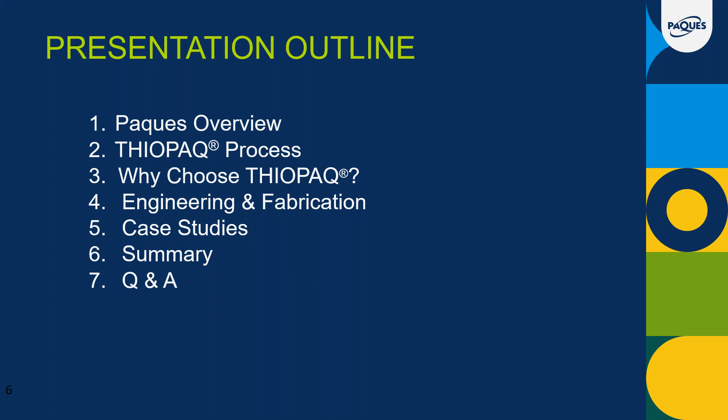So without further ado, next slide, please.

Okay, let's go. So Paques is just over 60 years old. It was founded in 1960 in a place called Balk in Friesland, in the north of the Netherlands, about an hour north from Amsterdam for those of you who have traveled in Europe. It's a small town called Balk, of which Paques is the major employer.

Over the years, as you can see from the map, we've expanded across the globe, first in China and then building up in Brazil, North America, Malaysia, and for Asia Pacific in Kuala Lumpur. We also have an office in Thailand, and also Chennai in India. You can see that we have a variety of production sites across the world, as well as laboratories and very important pilot facilities for what we do.

It was founded by the Paques family, and originally it was just building tanks for farmers, for silos. And then the founder, Mr. Paques, met with a couple of other guys, and they started to look at the possibilities of using bacteria. And then was born the idea of anaerobic digestion. We've obviously moved on from there, from those very early days and our humble beginnings.

And now we're 62 years old with more than 500 people. We have installations in over 60 countries, and Paques is present in one way or another, often largely, in more than 3,000 places worldwide.

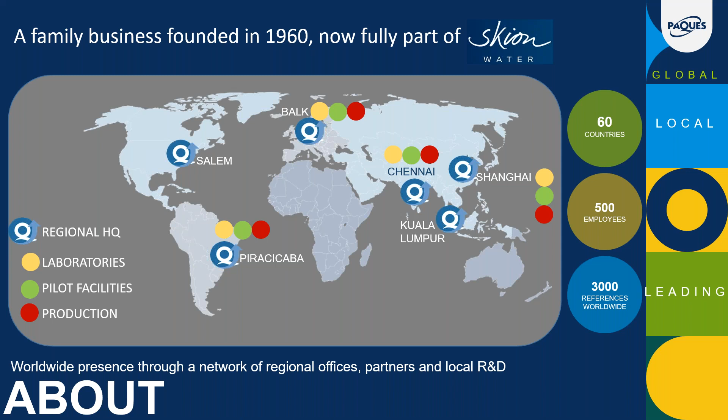Okay, so the essence of what Paques does is using biotechnology to clean wastewater and gas. And today we're going to concentrate on the THIOPAQ, the sulfur system. If you look very briefly here, you'll see that we genuinely are numerically the market leaders, but also we're the market leaders for the level of research and invention that we do.

Major markets that we work in across the globe are the pulp and paper industry, especially packaging, the food and dairy industry, beer and beverage. I'm not going to read all of those through, but I'm sure many of you on the call are from those industries, and municipal as well. We concentrate on the removal of COD, desulfurization, which we're talking about today, and then of course nitrogen and phosphorus removal, and indeed sulfate removal.

Thank you. Okay, so our tagline, green before green was a thing. We came up with that recently because we felt that what Paques does has always been green. But sustainability became much more of a thing globally, and it's an increasing thing now as all over the world, all our major customers are asking us, what are you doing for sustainability? How can you help us with our sustainability? Most companies are employing people who are specifically responsible for sustainability. It's a big thing, and we're a big part of that, so we feel that this tagline is very fair.

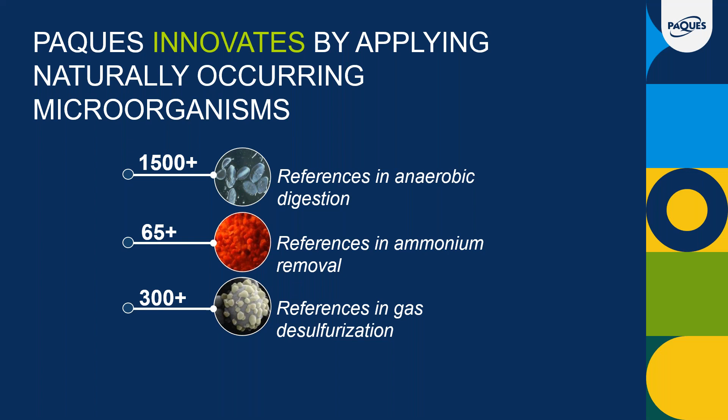Okay, so we take nature and we do something with it. All these references in anaerobic digestion, for COD removal, ammonium removal, nitrogen removal, and desulfurization, which we're talking about today, are about taking bacteria. I like to describe it as we make little villages of them, which create the granules. More people call it the granules, that's the proper title, but I like to call it little villages of clever bacteria, which with some serious R&D and technology go into the tanks and they do their magic. It's a natural thing. We're part of nature, and we like that.

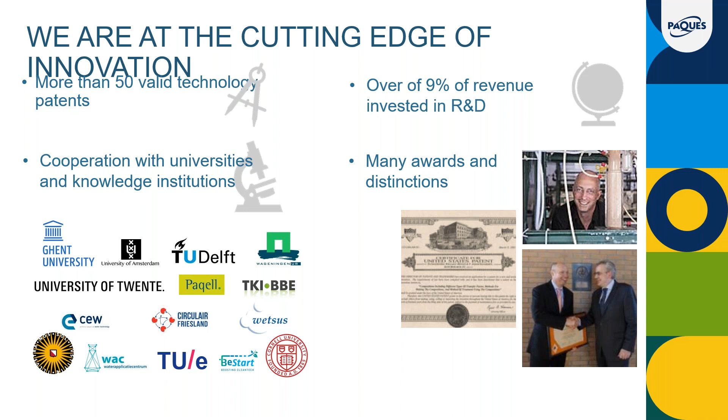Next slide, please. Now we'll get into the THIOPAQ process. I'll give a general introduction, and then Andrew will get into the details after that. Next slide, please.

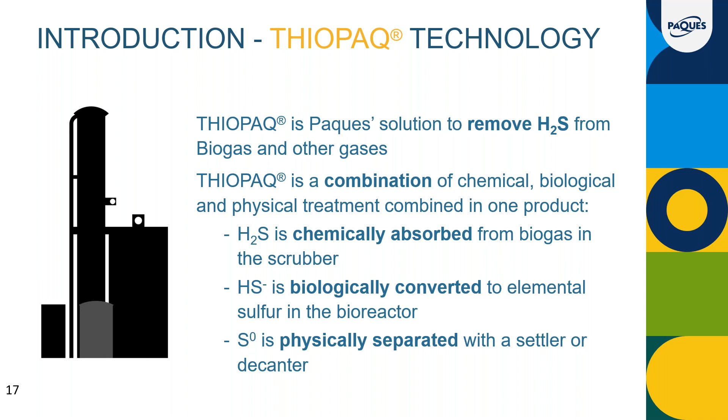So sometimes the THIOPAQ is called a biological scrubber. It's really not. It's a combination of a chemical scrubber and a biological conversion of the sulfide that is removed in the bioreactor, and then a physical separation of the sulfur that is produced, which is a solid, in either a settler by gravity or a decanter. Next slide, please.

So the THIOPAQ process, or the roots of it, were developed in the mid 80s and late 80s in cooperation with the University of Wageningen in the Netherlands. And the first THIOPAQ was installed in 1992 at a combination of paper mills in the Netherlands. So that was the first plant, and I think it started up in 1993.

And you see, it took a while before the technology really took off, maybe 10 to 12 years or so. But once it became clear that this was a real cost-effective technology for removal of hydrogen sulfide from gases, which means from biogas, landfill gas, and even gas of the oil and gas industry, it really took off ever since.

Right now, of course, there's many projects in North America for treatment of dairy gas produced from dairy manure. But before that, the initial, let's say, 10 to 15 years, the majority of the THIOPAQ installations were at high-rate anaerobic treatment plants. So basically, Steve already showed a little bit of it, anaerobic reactors that treat effluent of industries, as well as a few landfills. But to date, probably about 2/3 of all the THIOPAQ installations are at industrial wastewater facilities.

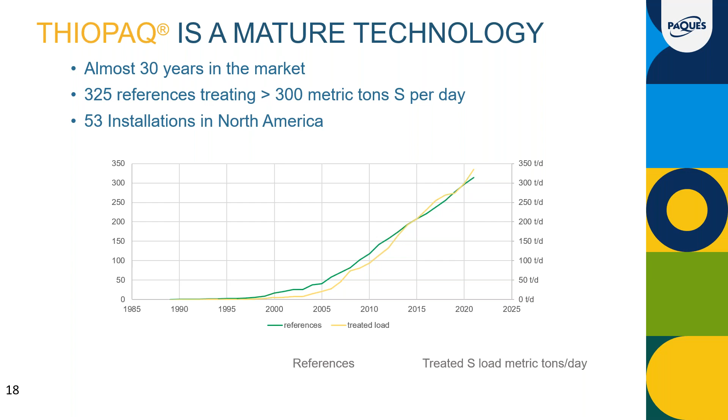By now we have about 325 plants working, or some of them still in the construction stage, and treating a total of about 300 metric tons sulfur per day altogether. And there's by now 53 plants in North America.

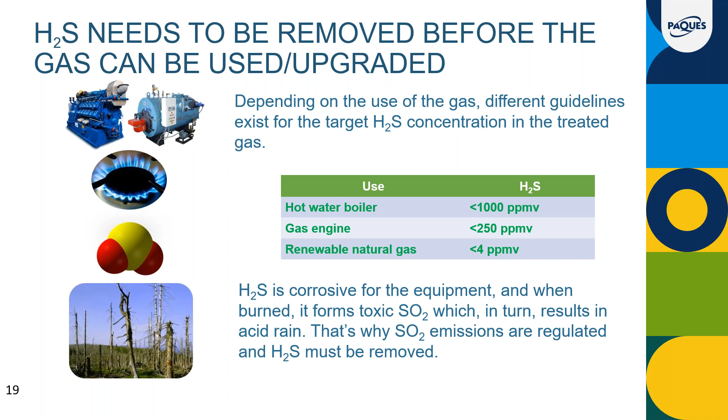Next slide, please. Well, I think we all know why hydrogen sulfide needs to be removed. It's very toxic. It's very corrosive. That's another reason, and it also produces sulfur dioxide upon combustion. So there's environmental regulations to control emissions. Next slide, please.

Paques uses only naturally occurring bacteria. Almost all technologies that Paques has developed involve bacteria, like the anaerobic reactors, the digestion process, the Anammox reactor. It's also a process that uses bacteria to convert ammonia into nitrogen gas, and the THIOPAQ also, which uses thiobacillus bacteria, of which there are many kinds.

We use a specific bacteria that is very salt-loving, halo-tolerant sulfide oxidizing bacteria. So halo-tolerant means salt-loving, and these bacteria don't need an organic material to grow. They get it from chemicals such as sulfur or sulfide. And these bacteria are very hardy. They can grow under very extreme conditions, depending on the type of bacteria that you isolate.

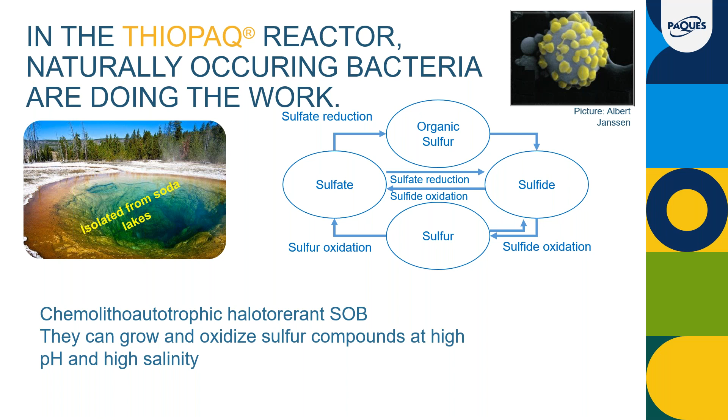In the right corner on the top, you see a bacteria, a thiobacillus bacteria, that excretes the elemental sulfur that it produces. So the little yellow bulbs, that's elemental sulfur. Next slide. Andrew will explain the process in more detail.

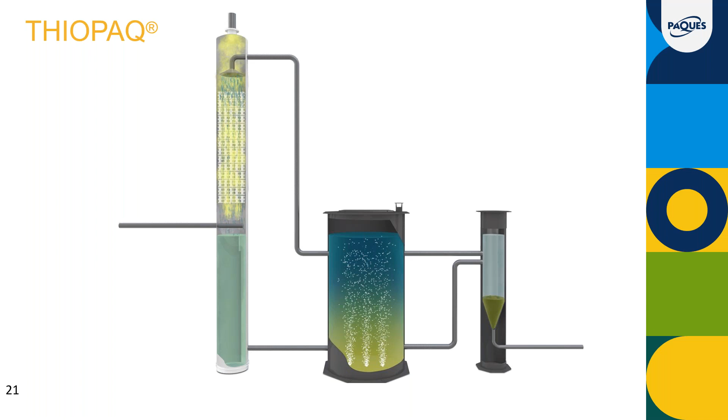Yeah, well, thanks, Martin. Yeah, so the THIOPAQ process consists of 3 main process steps. You have a scrubber column, which is an absorber. You have a bioreactor, and a means of settling the sulfur in a physical separation device, shown here as a settler. Next slide, please.

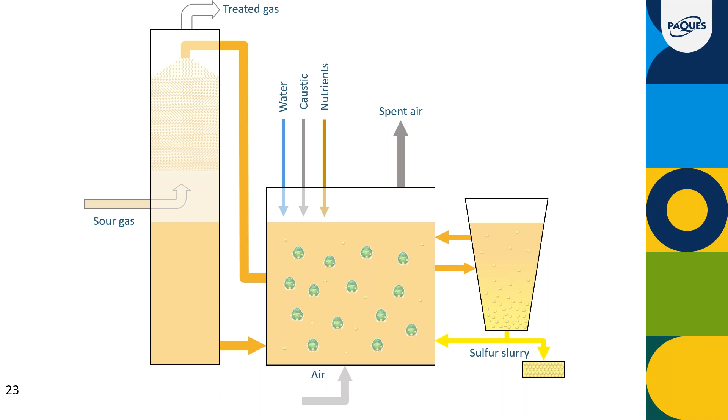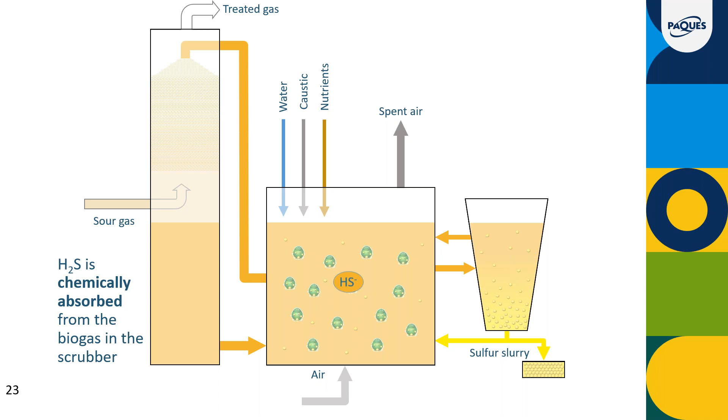So what we're doing in the bioreactor is converting the hydrogen sulfide into elemental sulfur, and then that elemental sulfur is removed in the sulfur settler. If we can advance the animation, please. And then the final disposition of that sulfur particle is removed from the settler and leaves the process.

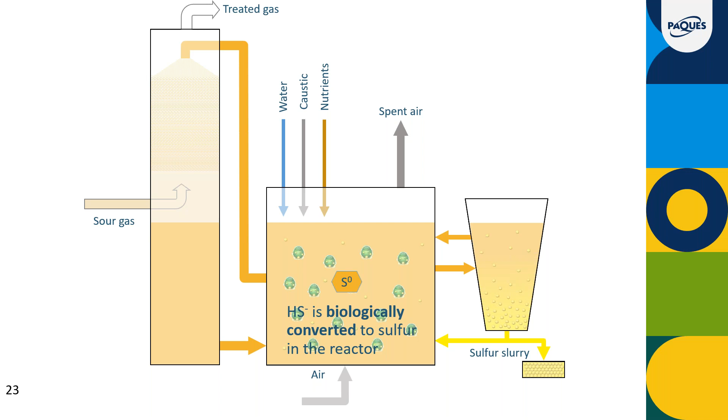So that gives you just a rough overview of the disposition of the sulfur as it moves through the process. It goes from the gas phase to the liquid phase as sulfide, and then to elemental sulfur, and then out as a slurry in the settler. Next slide, please. Next slide.

Okay, if we can keep going with the animation. So the biogas, again, I'm going to drill down a little bit into these 3 unit operations so you really understand what's happening here. Again, we have a water wash. We're taking the liquid stream from the bioreactor and flowing countercurrent to the biogas, which is flowing up.

And the packing material, there's about 6 meters to 10 meters or so of packing material inside of the scrubber. This is the plastic rings that you see here. And this provides a high surface area to have the intimate gas-liquid contact, so that mass transfer of the hydrogen sulfide into the aqueous phase as sulfide readily happens. And this is an alkaline wash.

So we call this, as Martin mentioned, chemical absorption. There's nothing biological going on here. It's all chemical. It's a caustic scrubber, and the H2S readily moves into the aqueous phase when there is an elevated pH. So typically we're around 8.3 to 8.5 pH.

So the reaction here that you see is, of course, since it is a caustic scrubber, we are consuming alkalinity. And alkalinity is represented there as the OH minus molecule. So we take the hydrogen sulfide plus the OH minus, and that gives us the bisulfide, which comes out of the bottom of the scrubber, and now we're going into the bioreactor. Okay, next slide, please.

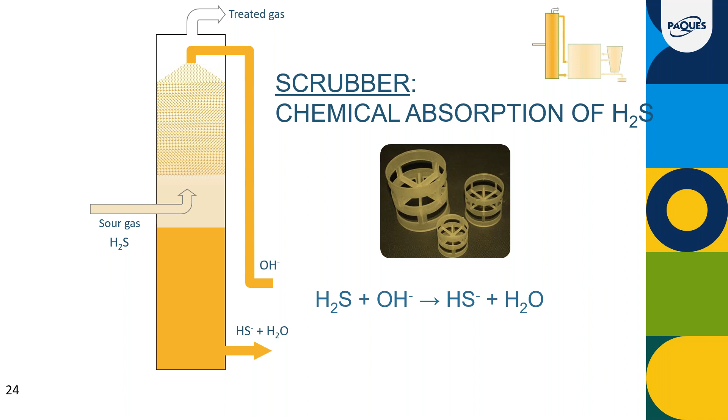So again, the bioreactor is the heart of the process. This is where all of our controls and automation are; the scrubbing part is relatively easy. We're adding water to the top, and we're flowing the biogas, and that scrubbing happens very simply. In the bioreactor, we have to make sure the conditions are just right for this process to happen. We want to keep the bacteria happy. So how do we do that?

We need to add air, because air is part of the reaction. We need to have oxygen. There are air strings at the bottom of the bioreactor with diffusers that provide not only air and oxygenation to the bioreactor contents, but also some mixing.

It's very important to note that the air that we add is completely decoupled from the scrubber, so we're not introducing any air into the scrubber. This just comes into the bioreactor and then out the top of the bioreactor as spent or exhaust ventilation air, if you will. That vent air typically is very, very low in H2S, non-detect, and it just goes to atmosphere.

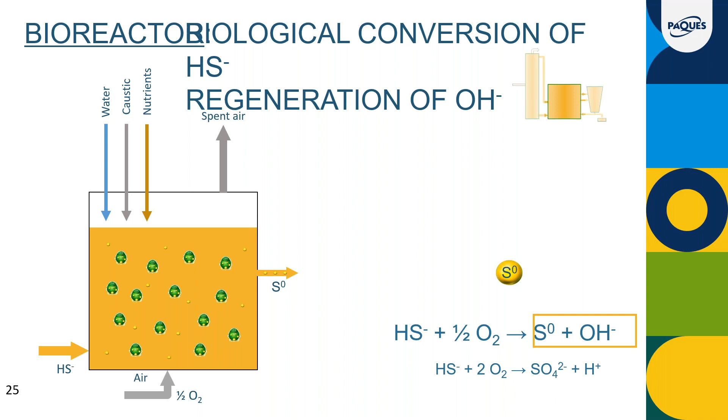So the key thing to note here, and this is really the heart of this process, is what's outlined there in the orange box on the equation, and that is that we're producing the elemental sulfur so it can be easily removed from the process. And as part of doing that, we're regenerating the alkalinity. So recall from the previous slide, we're consuming that alkalinity, while in this process, we're producing that alkalinity. So the net effect is we get a very low operating cost per pound of sulfur that we're removing. Okay, next slide, please.

So the final step in the process: we've taken the H2S from the gas stream to the sulfide, and the bioreactor converted it from sulfide to elemental sulfur. Now we've got to remove the solid from the process. So in this picture, we're showing a simple cone bottom settler. If we can advance the animation, we'll see some of the other devices that are used here.

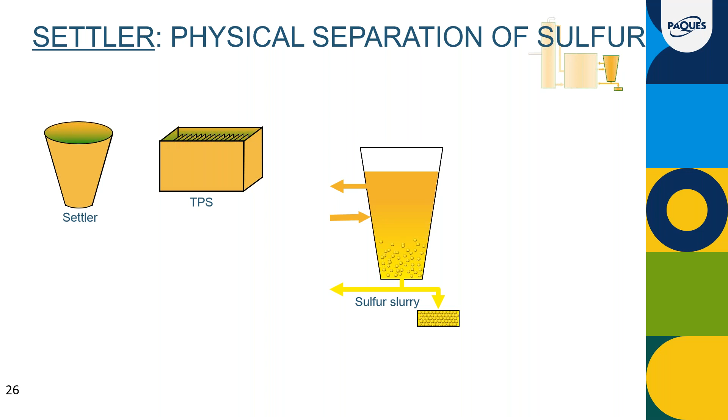We can use a tilted plate separator to enhance the surface area and the settling characteristics of these particles, or we can use a centrifuge that will generate solids on the order of maybe 55 to 60% solids. And for our larger installations, we're generally going to use a centrifuge just because it makes the process more efficient, and we're just dealing with a lot of sulfur.

And also this material, as Steve and Martin mentioned, can be used as a fertilizer. Paques has the FertiPaq business, and it can be used as a fertilizer, or more typically what's being done in North America is it's just being used as a soil amendment and discharged maybe in some aerobic lagoons and used to irrigate some of the fields.

Okay, next slide, please.

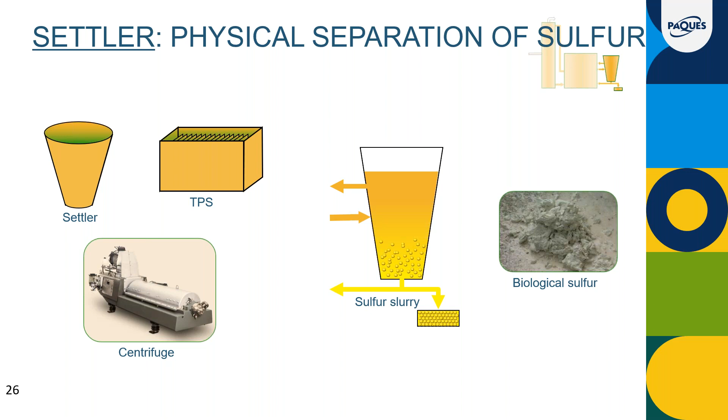What can you expect as far as performance and reliability? Well, this process can take very high levels of hydrogen sulfide. We have installations that are taking H2S levels upwards of 20,000 ppm and higher, and we can get removals down to less than 25 ppm.

Since it's a chemical scrubber, like I said, the absorption process happens very readily, and so we can get very good removals, and we monitor the alkalinity to get the levels of removal that we need, and also design the scrubber in such a way with particular packing height to get the right target removals for our customers.

It's a very reliable process. There's not a whole lot of moving parts. We just have some rotating equipment. The circulation pump, which, like I said, just runs in a closed loop, delivering that wash solution to the top of the scrubber. And again, because we're regenerating the sodium hydroxide, the operational costs are extremely low.

And as I mentioned, there is no dilution with air. The oxygen that we add to the bioreactor is completely decoupled from the scrubber. I also wanted to mention that this sulfur that we're producing is hydrophilic, so we're not going to be seeing any plugging or anything in the packing. So it's very user-friendly. Operational costs are low with the high removal. Next slide, please.

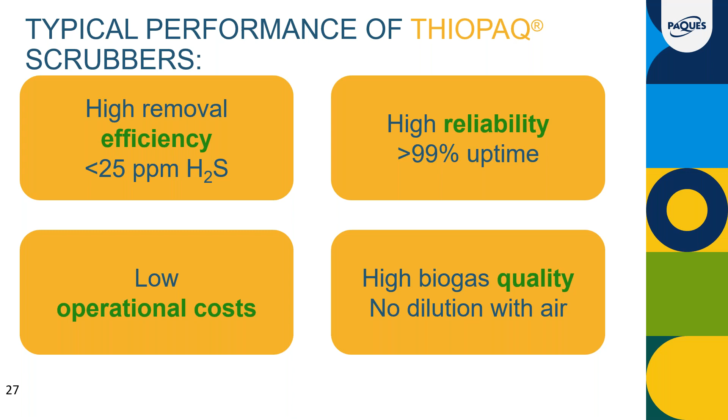So what do you do if you feel like you have an application that you have hydrogen sulfide in your biogas? Well, you can call Martin or I. Our contact details, I believe, are in the slides here. And we'll talk to you about your application, and we'll send you a questionnaire. Sometimes we'll just fill it out with you on the phone and get some of the basics of your application.

What's the gas flow rate? What's the H2S concentration? What are you looking for as far as treatment? Do you operate in a campaign mode? In other words, do you operate for a certain amount of time and then you're down for a couple of weeks? Or are you a manure dairy, a cow dairy where the cows don't stop pooping, we're just running all the time? We need to know this kind of information so we can configure our system to meet your specific needs.

Of course, we need all the characteristics, if there's any VOCs, is it a landfill, is it a food digester, CO2 concentration, oxygen concentration, and those types of things. So generally, we can turn a proposal around in a matter of a couple of days. So we look forward to getting some of your inquiries and seeing how this technology best fits your specific application. Next slide, please.

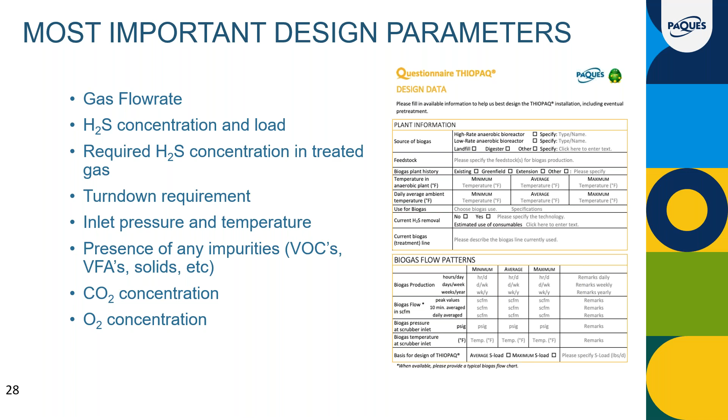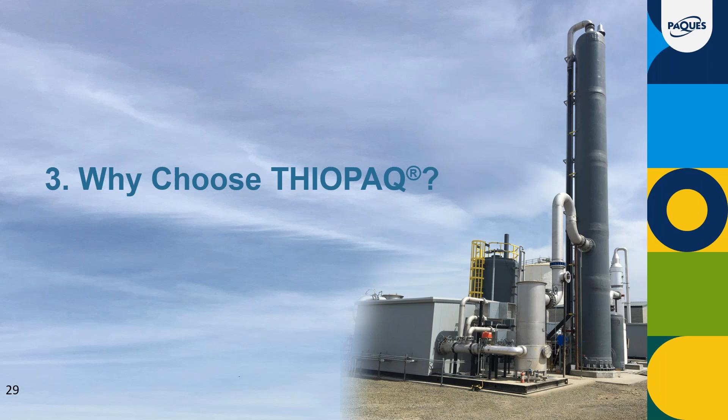Okay, so I'm going to turn it over back to Martin, and he's going to talk about some of the specifics as to why you should choose this technology. Thanks, Andrew. Next slide, please. So why choose the THIOPAQ? Well, Andrew already explained some of the reasons.

The major reason overall for most of our customers, and especially for RNG projects, is the lowest total cost of ownership for many desulfurization applications. Certainly when the sulfur load is more than, and this applies to North America, approximately 80 pounds per day, then the THIOPAQ scrubber already becomes attractive. In some countries, it's even at lower sulfur quantities.

But this is mainly because of the low operating costs, because the biggest portion of the operating cost is usually the caustic, but the caustic consumption is so low, it varies in the range of about 0.3 to approximately 0.7 pounds of 100% caustic per pound of sulfur removed. This of course helps tremendously. Also, the process is very robust and therefore reliable.

Our typical uptime is more than 98%, and this is also very important for the RNG market because of the very high value of the biogas, so that people want to get everything out of their biogas supply, and they don't want the hydrogen sulfide removal portion to interfere with that. Many plants also have greater than 99% uptime.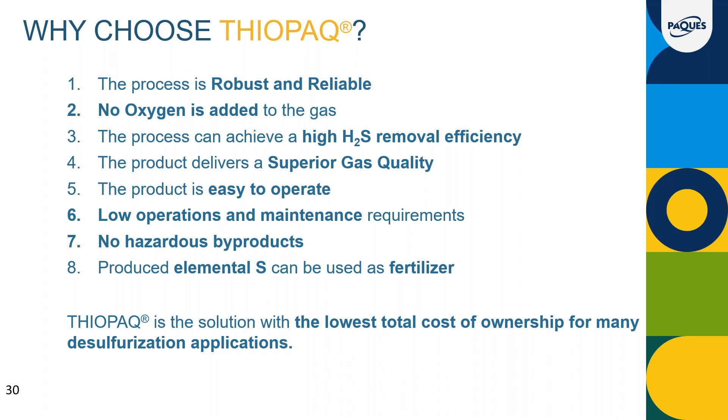The biggest market by sulfur quantity for us is oil and gas. Those projects are done through Paqell, because that market requires meeting different standards that Paques itself is less accustomed to. So those are handled through Paqell, which is based in the Netherlands, a 50-50 joint venture between Shell and Paques.

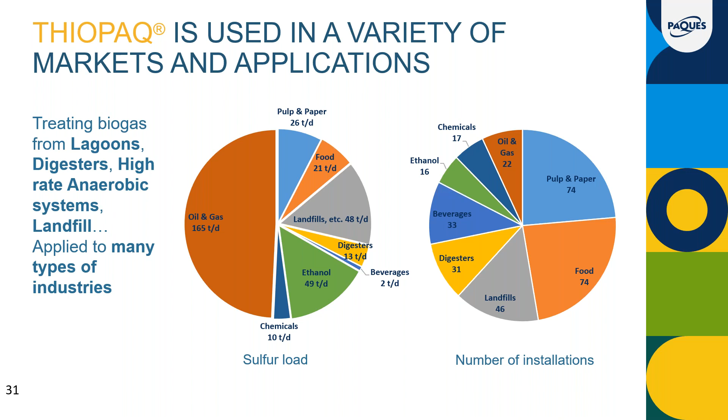So almost half the sulfur load treated is from the oil and gas industry, followed by landfills, because landfill gas can also have very large and high sulfur concentrations. Next slide, please.

Here are two examples of some extremes. To the left is a very small scrubber that only treats 20 pounds a day and 60 CFM.

And I forgot which country that is, but still that was an attractive solution for such a small THIOPAQ versus another technology. In the US, we don't sell them this small. The smallest one would treat up to about 275 pounds of sulfur a day, and from 200 to probably something like 900 CFM. So it would be overkill for such a small application.

The largest one is in Korea, South Korea, at a landfill. You see the big scrubber there, and it treats 20,000 CFM. Our scrubbers, of course, if you hear caustic scrubber, you think of much smaller scrubbers probably. Ours are much larger because we operate only at a pH of 8 to 8.5. So the driving force for hydrosulfide to be absorbed is much smaller than in a traditional caustic scrubber, where you operate at pH of 11 or 12 or even higher. But because we operate at this low pH, we also don't absorb all the carbon dioxide that consumes caustic. That's the big advantage of operating at this lower pH.

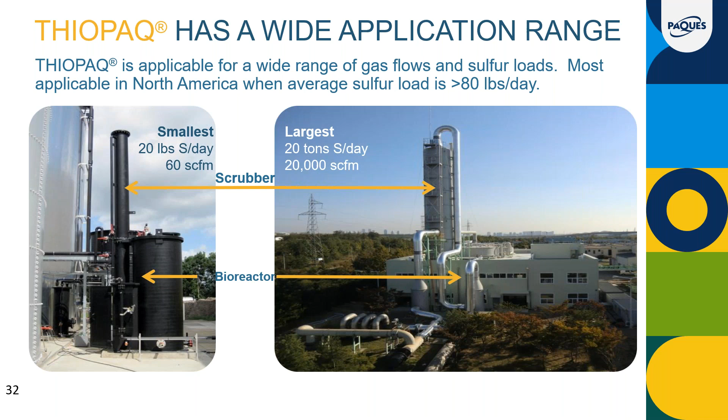Here you see some different examples of THIOPAQ installations. They all look a little bit different from what we typically provide in North America. The 4 and 13 ton per day units are at oil and gas plants. In the US, we provide a more standardized system up to a certain treatment capacity, so we typically provide the scrubber, the bioreactor, the container with all the process equipment, and then the technical services, the basic engineering, the P&IDs, etc. Up to a certain load, we containerize the equipment. If the load or gas flow is higher, we can't follow this approach anymore, and the process equipment is shipped loose.

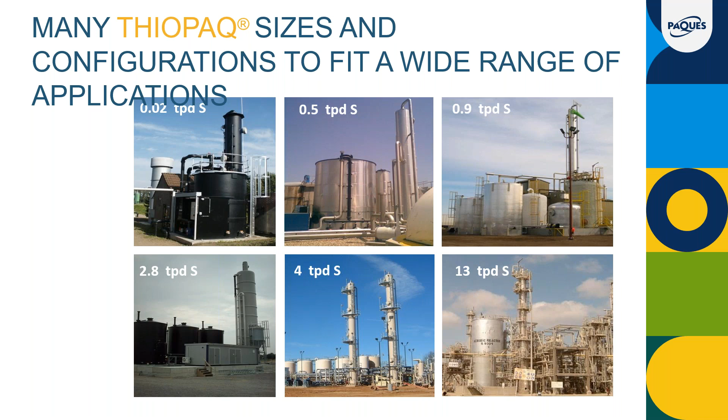This is a little bit about operating requirements, operating and maintenance requirements. For a typical installation, if you don't have a decanter, it takes on average between half an hour and at most about an hour a day to operate and maintain the system.

The consumables are caustic, which can be 50% or sometimes 20 or 30%, depending on the customer, and a nutrient solution which Paques provides. Utilities include water, which has to be below a certain hardness of 10 degrees German hardness, or 170 milligrams per liter calcium carbonate, power, instrument air, and there's a heating and cooling requirement.

We often want to cool the gas prior to the scrubber just to remove some condensables. Often we do that such that no heating or cooling of the processed liquid is required anymore. The THIOPAQ process itself, the conversion of sulfide to elemental sulfur, is exothermic, so it produces heat that, if there's too much, needs to be removed. Also, dissolving caustic in water produces some heat, that's an exothermic reaction. And the air that is injected into the bioreactor is also hot at that point and produces some heat.

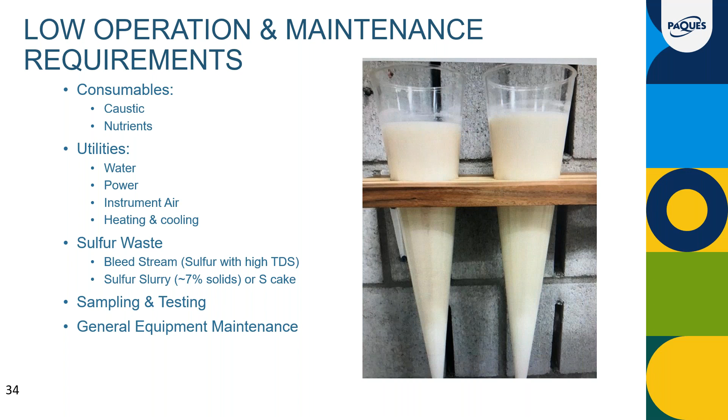We've seen some other technologies in the market as well. The scavenger and media and activated carbon systems tend to be economical for lower sulfur loads, we think above about 80 pounds a day that the THIOPAQ is very competitive. We've seen bioscrubbers, but they tend to be more for very low sulfur loads, and where you don't mind adding air to the biogas, so not so much for RNG applications.

Iron chelate, we've seen that more for higher sulfur loads, and in particular in the oil and gas industry. We don't know if the sulfur cake that they produce is acceptable for agricultural disposal, because it might contain other chemicals that are used in the process.

And we've also had some competition from companies that like our technology very much and have tried to copy it, but most of them, or all of them, I believe, not very successful. Next slide, please.

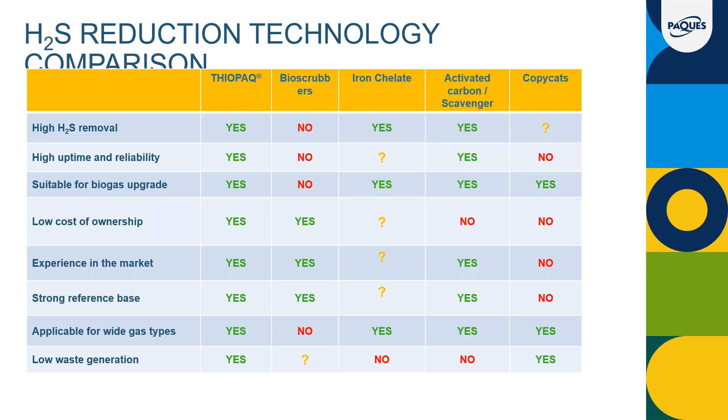And it's back to Andrew again. Yeah, okay, thanks, Martin. I'm going to touch here a little bit on the engineering and fabrication aspects of the technology. So next slide, please.

So when you buy a system from Paques, you get a very detailed, comprehensive engineering package. It's really configured for what the EPC contractor needs to do the complete upgrading process or the complete biogas installation, whether it is upgrading or maybe pre-treatment for a cogen process or whatever.

We don't do the installation ourselves, but we provide a very comprehensive engineering package for that. So what does that include? It's a very detailed mass and energy balance. You'll get a spreadsheet with a stream table. The stream table will have stream numbers that correspond to a process flow diagram, and you'll know the composition of that stream all the way through the process.

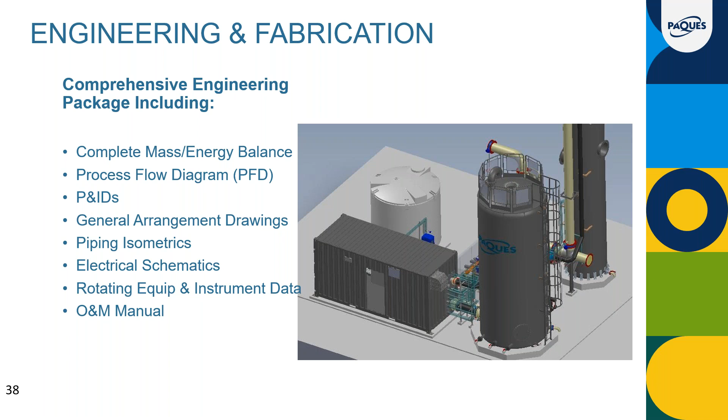So that means Endress+Hauser instrumentation, Goulds pumps, Bray valves, that sort of stuff. So spare parts are readily available. You don't have to go searching all over the globe, and especially at this time when things are pretty hard to get, that simplifies it even further.

So the container and the skids are manufactured and assembled in our shop in California. The tanks, the bioreactor, settler, and scrubber, they're all made out of fiberglass or HDPE. The fiberglass is typically made in the Midwest. Okay, so next slide.

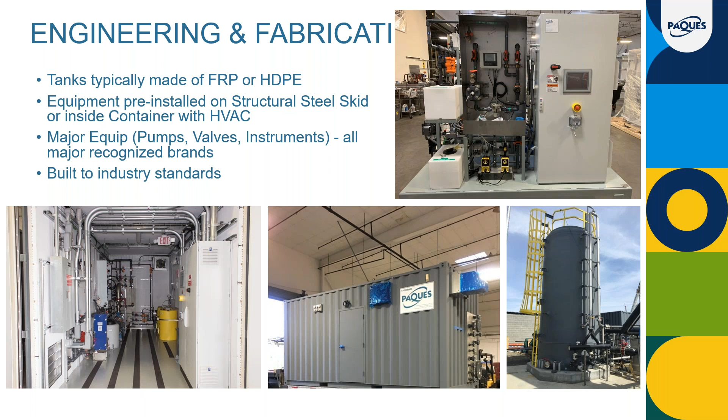As far as the control systems, everything is fully automated. The operator does not have to sit there and look over the system to physically operate it. What he does need to do is respond to alarms and warnings, but the system is fully automatic.

We typically use Allen Bradley PLCs and have a user-friendly HMI screen that includes some multi-trends that allow us to go in and trend. We have some preloaded trends that we can see some critical process parameters if we need to do some troubleshooting.

In the upper right-hand corner you see the control panel, and to the right of that is the instrument, what we call the sample loop. As I mentioned before, this system runs as long as we are providing the correct environment for the bacteria.

What we're monitoring there, we're taking a slipstream from the bioreactor and we're monitoring pH, temperature, ORP, and conductivity. The PLC takes those inputs and makes the proper adjustments to make sure everything is just how the bacteria want it. If we need more heat, we add more heat. There is a heat exchanger inside this container that was on the previous slide.

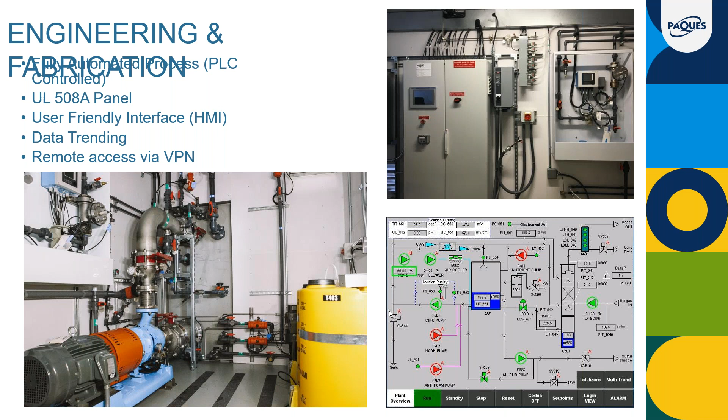Okay, I'll turn it back over to Martin, and we're going to wrap up here with some case studies.

Thanks, Andrew. Yeah, we have 6 case studies, but since we're already approaching almost 1 hour, we'll go through it really quickly. I always like to show this one. This was the first THIOPAQ that was built, the one that was put in service in 1993, at a paper mill. It basically gets the gas from an anaerobic reactor that treats effluent from 3 paper mills.

These high-rate anaerobic reactors, you have to imagine these reactors have a hydraulic retention time of only about 4 to 6 hours. So the waste in those 6 hours, especially because the water comes from 3 different production plants, the wastewater composition can change a lot, which of course affects the biogas flow rate and the composition.

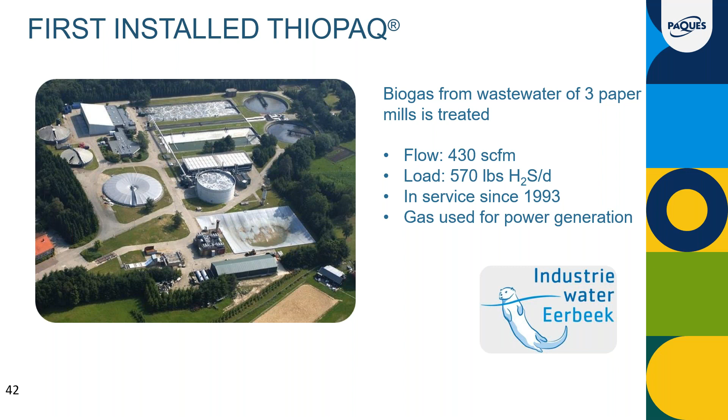So we'll see slides how it affects the performance of the THIOPAQ. Next slide.

This is a slide showing 11 years of operating data. The H2S varies from roughly 5,000 to 10,000 ppm. Guaranteed value was 50 ppm - that's the red line there, and you see how the treated gas has almost continuously less than 50 ppm with just a few excursions in all those years.

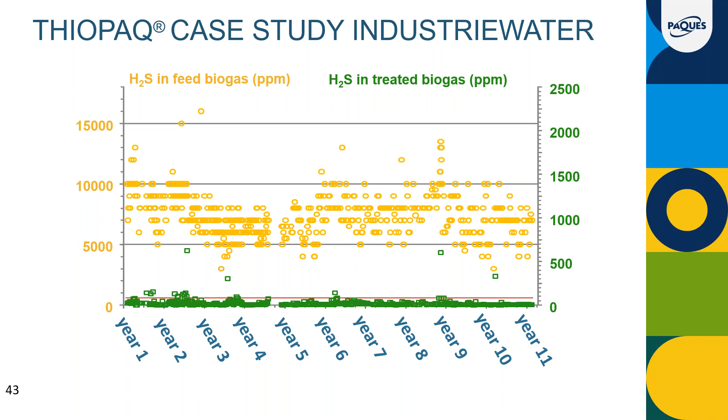Here you see a slide showing biogas flow over a period of 1 day. You see all these fluctuations because of the type of reactor it comes from and the type of wastewater it treats. We get this question a lot too: how does the THIOPAQ handle variations in flow or H2S concentration? Well, here you see...

The flow varies from 150 CFM to 450 CFM, and you see the impact on the hydrogen sulfide concentration, which is the green line. So it doesn't have a problem with that.

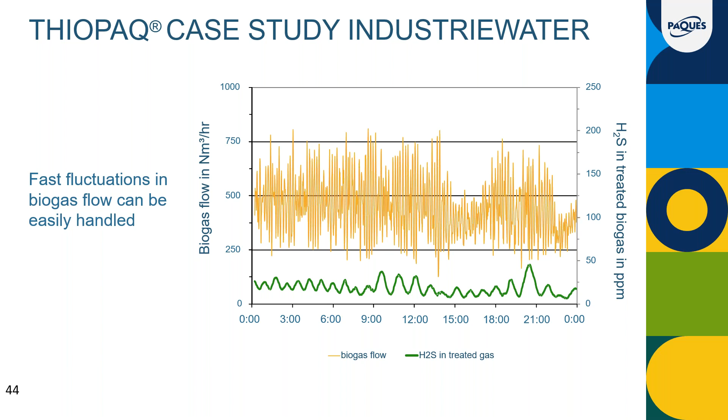As long as the sulfur load doesn't exceed the maximum design capacity, at least not for too long - that's an important parameter. This plant has seen an uptime of greater than 99%. Removal efficiency has averaged 99.7%, and the caustic use has been half a pound of 100% caustic per pound of sulfur removed, which is what we typically see. It depends a bit on the type of biogas, on the carbon dioxide concentration, and the absolute concentration of hydrogen sulfide, but this is about an average half a pound per pound. So that keeps the operating cost very low.

The design of the plants obviously is very different now, but this one was the first of its kind.

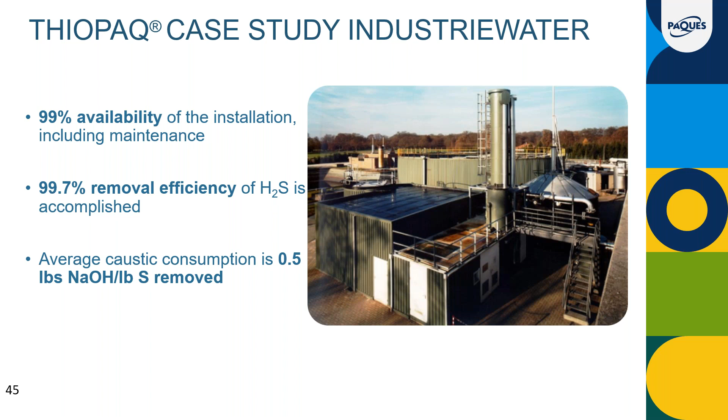Here you see a THIOPAQ scrubber at a landfill in Quebec. The scrubber is, of course, the big vessel. It's an 8-foot diameter scrubber and 80 foot tall. It was designed to treat 6,000 CFM. It was started up in April 2019. The average flow has been 5,700 CFM. H2S in has been 917 ppm. I must say the design value was 1,300 ppm. The H2S out has averaged half a ppm, so very good results, very high uptime. That's also because they have a very qualified staff that operates the RNG plant here, so it gets excellent maintenance and attention.

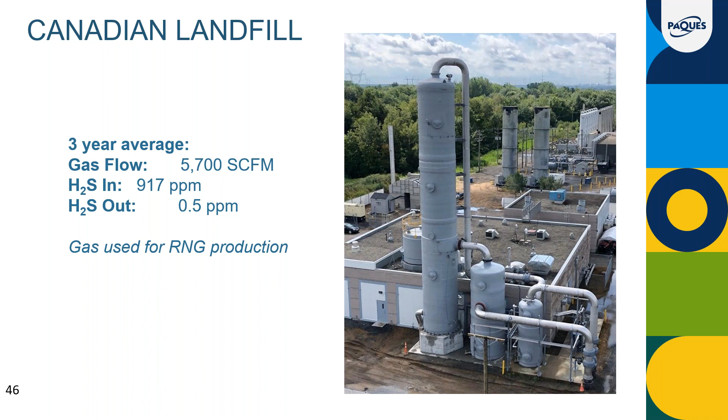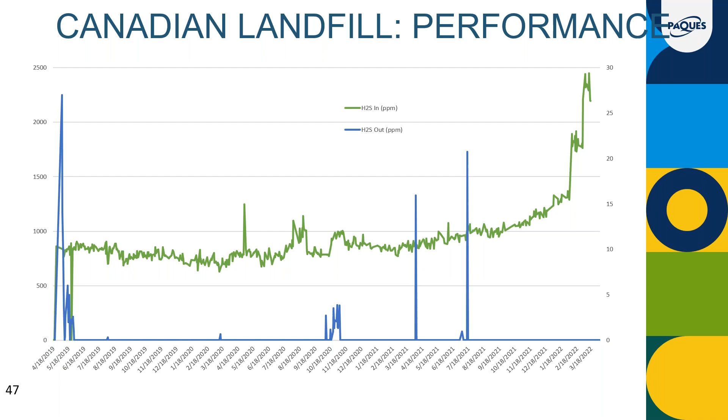This is a graph of the H2S concentration going in and coming out since startup. At startup, you see the guaranteed H2S concentration of less than 25 ppm was achieved in less than a week. Now lately the hydrogen sulfide concentration in the landfill gas has increased above its design value, but you see how the THIOPAQ is still dealing with it with no issue. So it's now treating 2,500 ppm instead of about 1,300 ppm.

And it's back to Andrew again. Okay, I'm going to run through these here fairly quickly. I think I have about 3 or 4.

So this is a large rum distillery. You can see it looks a little bit different because we have a train A and a train B. These are two 50% THIOPAQ systems. And as I mentioned before, turndown is an important requirement. This particular customer runs the distillery in a campaign mode. So they run maybe 90 days continuously, very hard, sending a lot of substrate to their digesters, producing all kinds of biogas, and then they're down for like 2 to 3 weeks with very, very little gas flow coming out of their digester.

So this allows us to gain a little bit more turndown capacity, and the way we operate the system is you switch to train A during this off season, and then go back to train B just to keep the bacteria happy and viable. So when they do start back up again, everything is ready to go and it ramps up real quickly. So the gas here is used as a fuel source to run their distillery boilers, saving tremendously on their fuel oil expense.

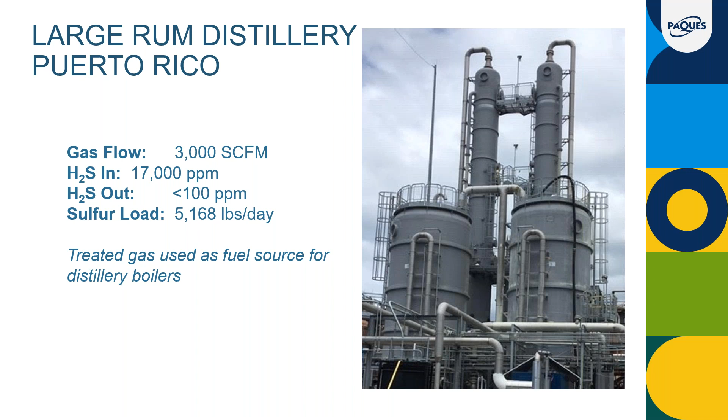This is the manure dairy digester application in Oregon. The gas flow, these are the design conditions: 1,800 SCFM with 2,000 ppm of H2S. This is an upgrading plant. There's an amine system downstream of this, and then it goes to gas compressors and into the pipeline.

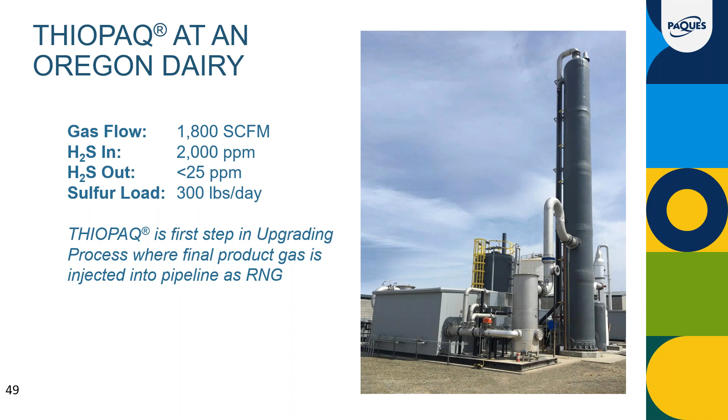And on the next slide here, we'll show you the data. You can see the design conditions—almost, very early in the startup, we started exceeding that 1,800 ppm of H2S, or 2,000 ppm of H2S. And so we upgraded this plant, or expanded it, and we were able to do that simply by adding a blower. We had enough capacity in the bioreactor. It was initially a little bit oversized, and so we were able to give them a lot more capacity just by adding a second blower.

So they've been running along here since 2019. You can see there on the right-hand side, even with that upgrade, they managed to exceed the H2S load. And what we heard was somebody had left a valve open or in the wrong position, and they were actually sending the removed sulfur from our process back to the digester. So they were cycling the sulfur, and all of a sudden the H2S concentrations in the biogas were getting very high, and then they realized it, and things came back down to where they were supposed to be. But all in all, very typical good performance from this system when they're operating it within the design conditions of the plant.

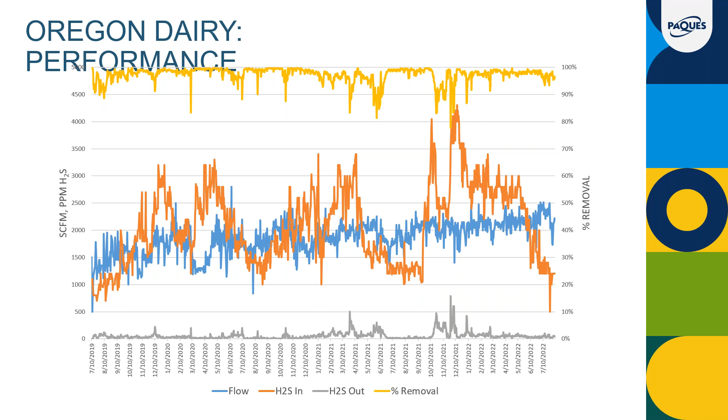Next slide. This next one is a dairy at an Idaho installation. Gas flow is about 1,000 CFM, 3,000 ppm of H2S. Again, these are the design loads. And similar to the Oregon installation, this is an upgrading project with treated gas.

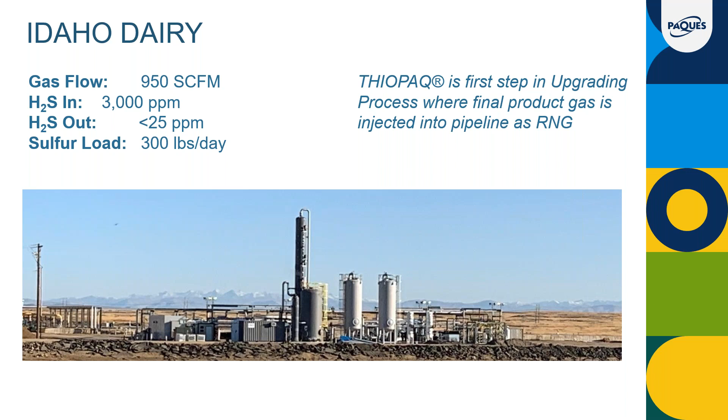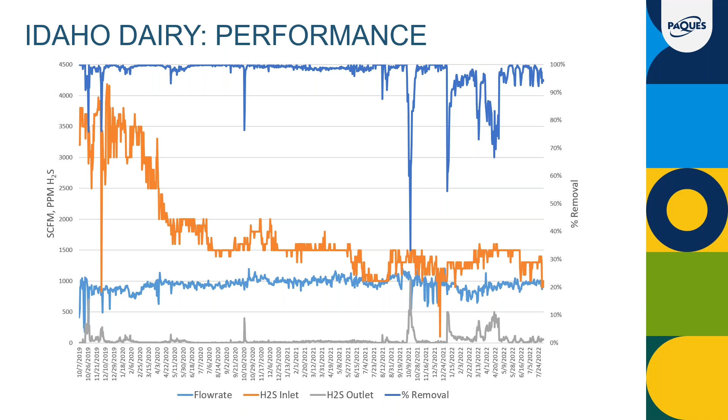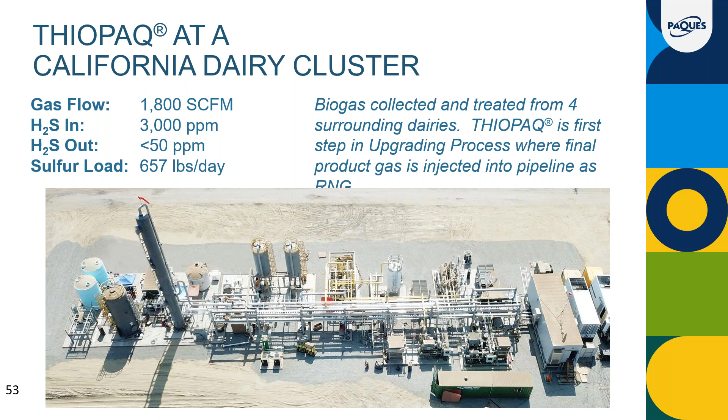And finally, this is an upgrading plant in California. This is a dairy cluster. So there's 4 dairies that contribute biogas from their digester, and it all goes to this centralized upgrading plant. The THIOPAQ you can see there to the left, and then the rest of the upgrading plant there, a nice picture. The gas flow here is 1,800 SCFM with 3,000 ppm design and a sulfur load of 657 lbs/day. So this again also goes to pipeline quality RNG. Next slide here, we'll show you the data.

This installation just started up last April, and we were very early on here operating already at design limits, pushing about 5,000 ppm where the design was 3,000. Of course, our biogas flow was a little bit lower than the 1,800 design at about 1,000, but if you take that with the higher H2S concentration, we were right at the 650 pounds per day mark, and you can see very consistent removal performance there.

And we talk to the operators regularly. They tell me they spend maybe half an hour to an hour a day operating the plant, and they have very good understanding of the operations and are learning every day and feeling very comfortable with it only after a short period of time of operating. Next slide.

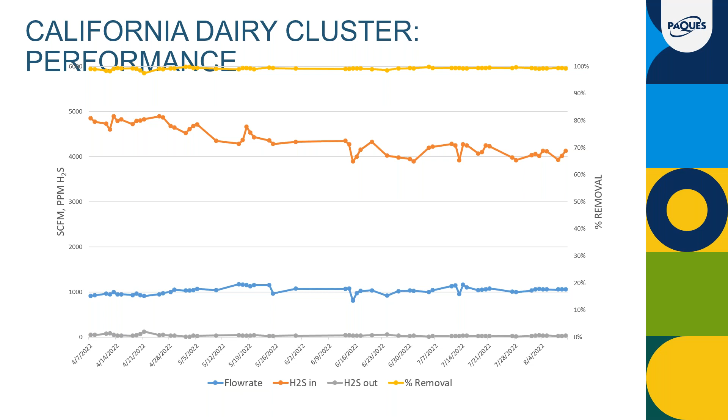So that's all we have for you folks. Just to summarize, this is a well-proven technology, 30 plus years of experience. Paques is the inventor of the technology, so that gives us the in-house experience. We've got 325 installations and counting. So we've seen everything, I think; if something goes wrong, we know how to fix it. We know how to execute these projects, and we know how to apply the technology. We know when it works and when it doesn't work.